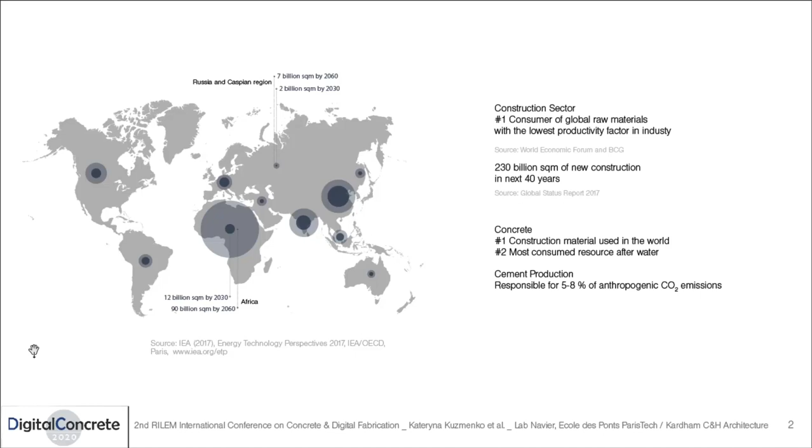This present study was made in close collaboration with Nicolas Roussel, entitled Environmental Life Cycle Assessment of 3D Concrete Printing Technology. Concrete is the most used construction material in the world, the second most used resource after water.

The environmental profile of a concrete element is mainly defined by the impact coming from cement production, which is a highly energy-intensive process that additionally emits a large amount of CO2 during limestone decarbonation, making in this way climate change the main environmental impact category of concrete.

Otherwise, the rest of the raw constituents needed for the concrete material preparation, like sand and gravel, possess a very low embedded impact. And furthermore, at the scale of the building element or building system, it has been shown that the traditional construction techniques by casting represent only around 2% of the overall environmental impact in the climate change category.

To sum up, at the scale of material, the main environmental improvement lies in the binder with cement substitution. At the scale of a building system or infrastructure, even larger optimization potential lies in the broadly discussed capacity of more precise and rational material deposition offered by digital additive manufacturing, largely known as 3D concrete printing.

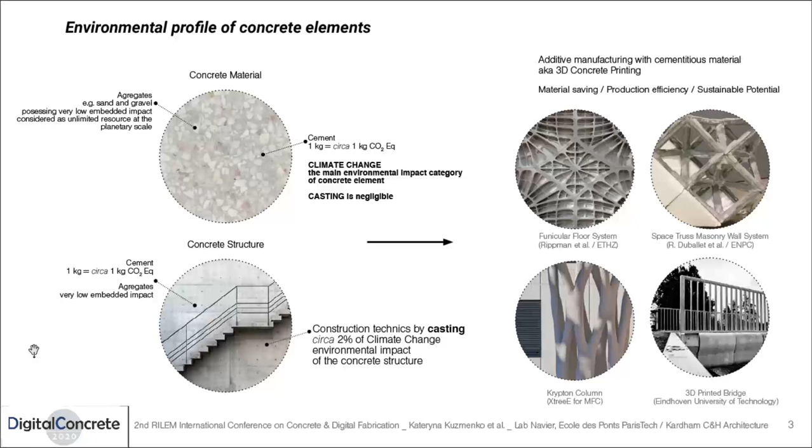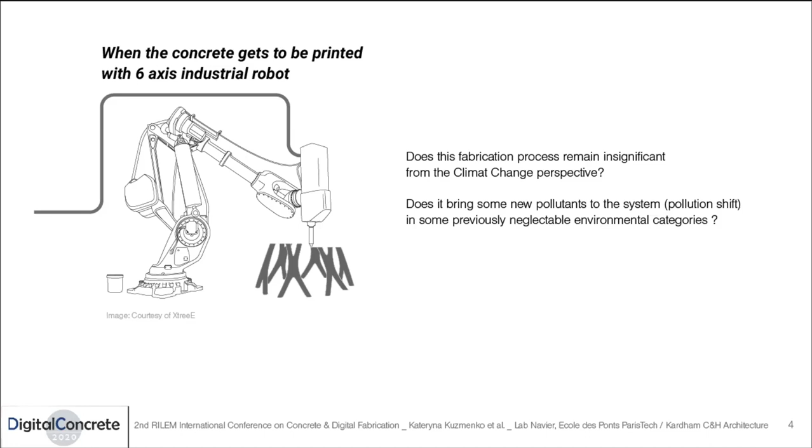Thus, when the concrete gets deposited with a 6-axis industrial robot, the main question from an environmental standpoint would be: does this fabrication process remain insignificant from the climate change perspective? And furthermore, does it bring some new pollutants to the system, so-called pollution shift, in some previously negligible environmental categories?

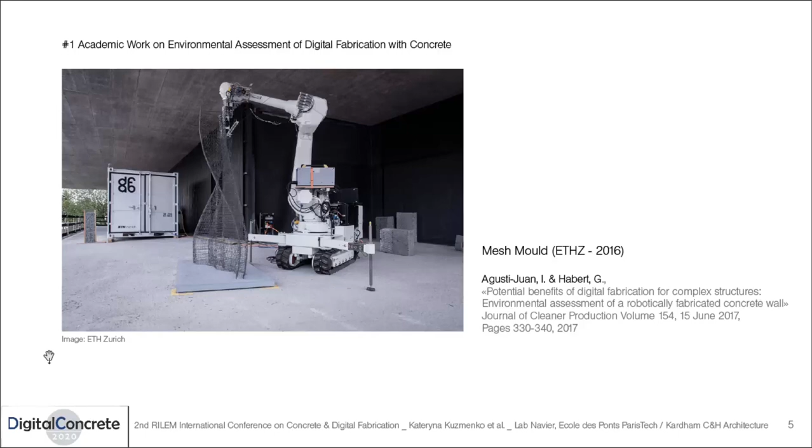Previously, there has been only one academic work studying the question. However, the mobile robotic construction technologies considered in this study remain very laboratory-like and hardly represent today an industrial setup of a printing cell, which leads us to the conclusion of a very poor state of knowledge in the field of the environmental profile and performance of 3D concrete printing technology.

The methodology of the environmental study is based on the life cycle assessment method. The method briefly consists of tracing all the energy and resources needed for the system functioning from raw material extraction to the end of life. The present study addresses mainly the fabrication phase, thus cradle-to-gate boundaries have been set as the system limit. Therefore, the printing process representing this fabrication phase is set as the process of reference, and the diagram here depicts all the processes considered within.

Basically, we can see two main flows entering the process of reference, the material footprint and the footprint of the robotic printing cell. As today the general tendency in practice goes to material reduction in the printed element, it is not exactly the footprint of material that we are going to be interested in here, but rather the compromise it will make with the impact coming from robotic construction technologies.

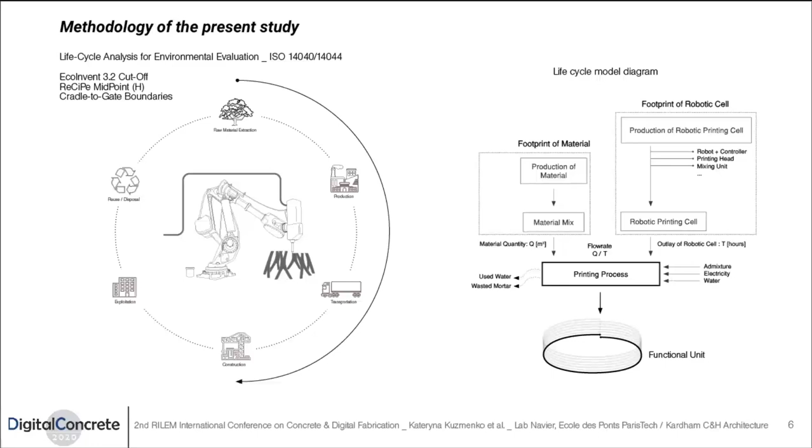In order to evaluate this compromise, the functional unit needs to be defined. Thus, in order to ensure a universal approach to the environmental study, the functional unit was set to the elementary brick of any object produced with extrusion-based additive manufacturing. It has one printed filament with a length L, section A, and an overall volume of 1 cubic meter.

Going back to the life cycle model, now with the given functional unit, we are able to quantify all the incoming flows needed for its production. Again, we've got three of them. The material footprint will be around 300 to 600 kilograms CO2 equivalent per cubic meter.

The footprint of the robotic printing cell that needs to be studied and characterized, and the impact related to the operational energy. The operational power for the present study was set to 55 kilowatts. This number comes from our industrial partner, the XtreeE company, and represents the theoretical sizing value of power consumption for the printing cell, including additional safety margins.

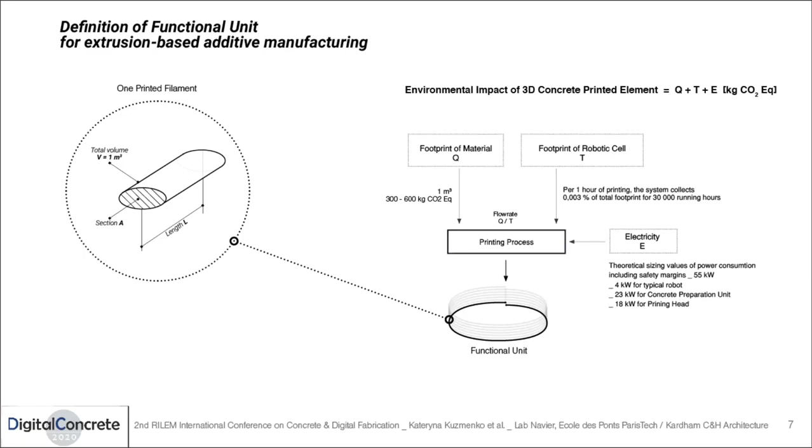The case study for the characterization of the robotic printing cell impact is based on the XtreeE layout, which is composed of an articulated ABB robot carrying the printing head developed in-house, supplied from the concrete preparation unit, and commanded by the computer workstation.

Again, the impact coming from robotic construction processes will be defined by two factors. First, the impact related to the production of all the cell's components, and second, the impact related to the operational energy, which is entirely defined by the type of electricity generation.

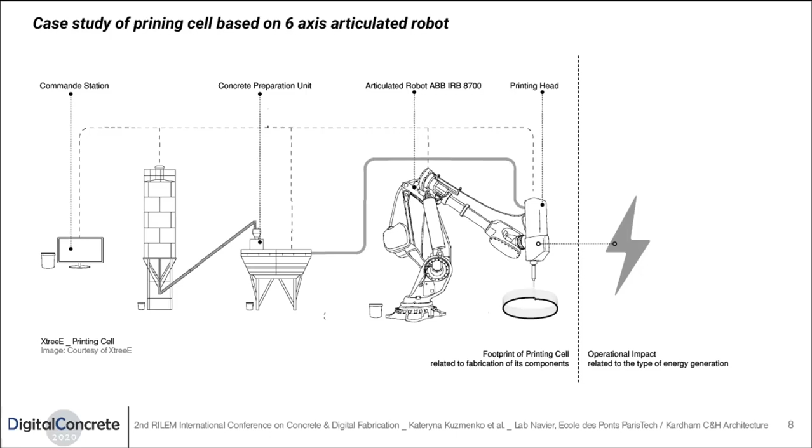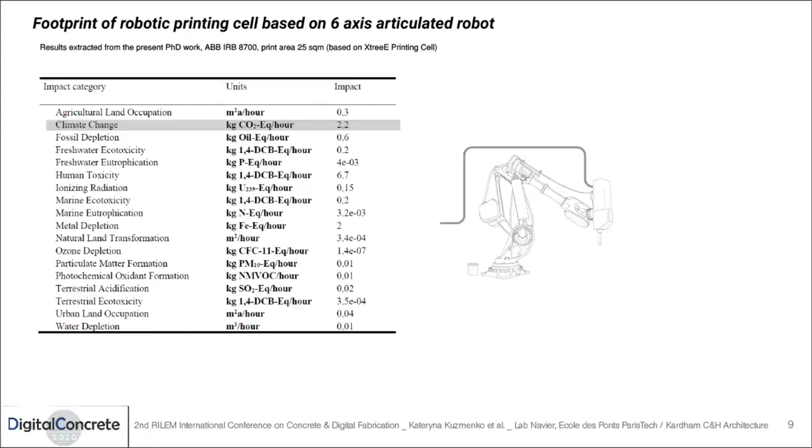In order to evaluate the footprint of the robotic printing cell, a detailed life cycle model was assembled and its outlay to the printing process is extensively studied. So here we've got the first results extracted from my present PhD work, concluding the hourly contribution related to the production of the cell to be around 2.2 kilograms CO2 equivalent per hour that the system will collect while printing. At this point, this number can be considered as negligible compared to the impact coming from material.

Furthermore, the impact of operational energy, as has been mentioned before, would be entirely defined by the type of electricity generation, which varies from one country to another. In the present study, we have been considering the world average electricity mix, which represents around 0.75 kilograms CO2 equivalent per kilowatt hour. And according to our first measurements, we chose an approximate consumption power of the printing cell of 25 kilowatts. These values still need to be validated with detailed measurements currently conducted by our team.

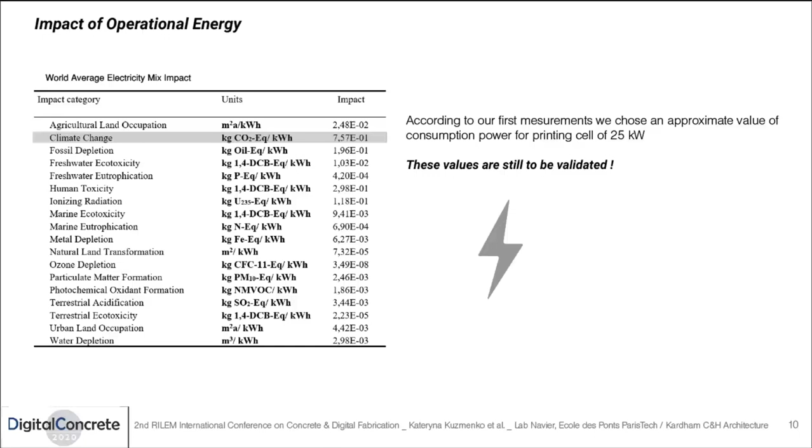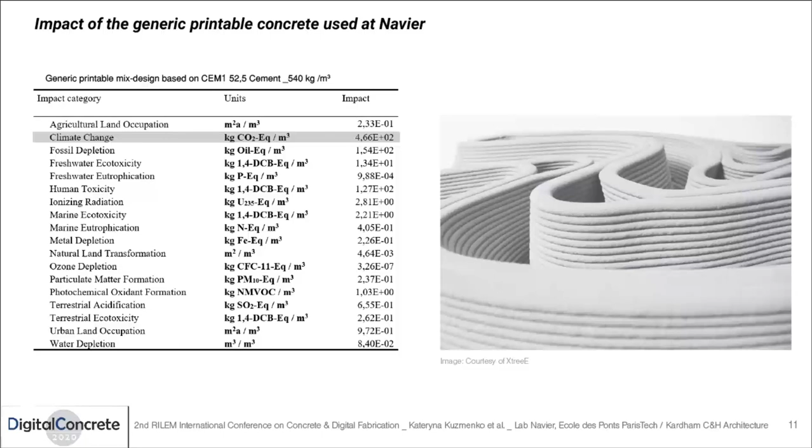Finally, the material footprint is not at all the focus of the present study, but its approximate impact is important in order to estimate the contribution coming from a robotic printing cell. Therefore, a generic mix design of printable concrete has been formulated at Navier Laboratory, and its impact in the climate change category would represent around 466 kilograms CO2 equivalent per cubic meter. To sum up, the environmental impact of any 3D concrete printed element will be defined by these three components: the material footprint, the robotic footprint, and the impact related to the operational energy of the 3D printing process.

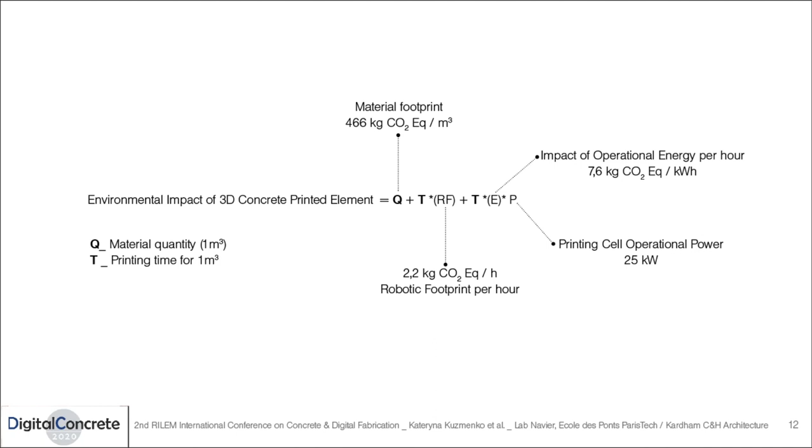So here we've got the first results of the case study of one printed filament with a total volume of 1 cubic meter deposited with a speed of 200 millimeters per second with a printing section of 1 square centimeter. Therefore, in the category of climate change, the total impact of 1 printed cubic meter will represent 750 kilograms CO2 equivalent. And the contribution coming from robotic printing processes here will be around 35% of the overall impact. Regarding the other indicators, we can observe a significant impact transfer and pollution shift caused by robotic construction processes. However, these data still need to be normalized to the global industrial context.

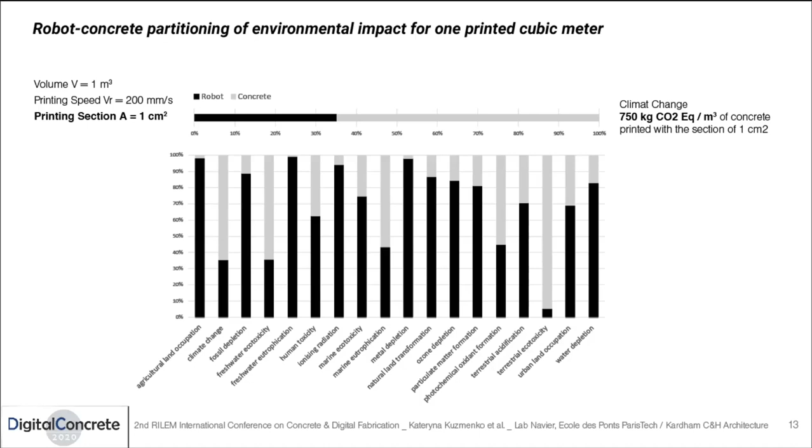In other terms, regarding, for example, the indicator of agricultural land occupation, where the robotic construction processes represent around 98%, it could simply mean that the contribution of the concrete is so low that the one of the robot turns out to be tenfold, when in absolute terms it's still very, very small and remains negligible in the global industrial framework. In closing, let's take a closer look at the overall system sensitivity, in particular the robot-concrete partitioning of the impact as a function of the printing section. For this part, printing sections from 0.2 square centimeters to 200 square centimeters were considered.

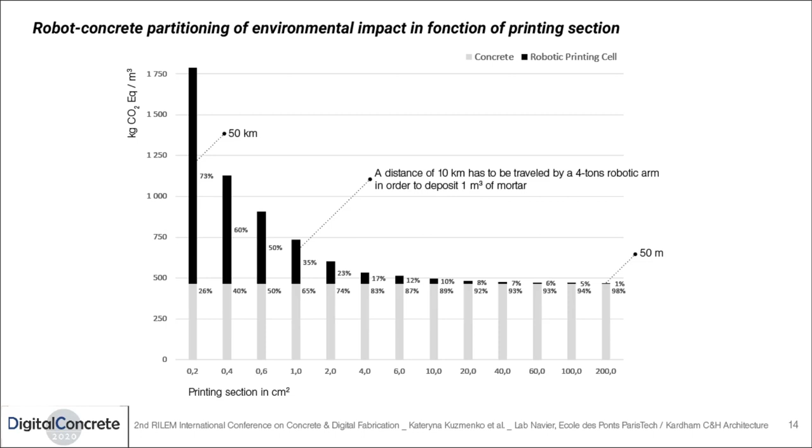And the present figure depicts a progressive decrease of the overall impact and particularly the contribution coming from the robotic printing cell as a function of the printing section, which can be explained by the simple fact that when the printing section of 1 square centimeter is considered, a distance of 10 kilometers has to be traveled by a 4-ton robotic arm in order to deposit 1 cubic meter of mortar. This distance increases to 50 kilometers when the printing section of 0.2 square centimeters is considered, and decreases to 50 meters when the printing section of 200 centimeters is considered. Which brings us to the conclusion that independently of the technological setup of the printing cell, the contribution of the printing process to the overall environmental impact of the element will be largely dominated by the mass of the printing device and the distance it travels in order to deposit a certain amount of material.

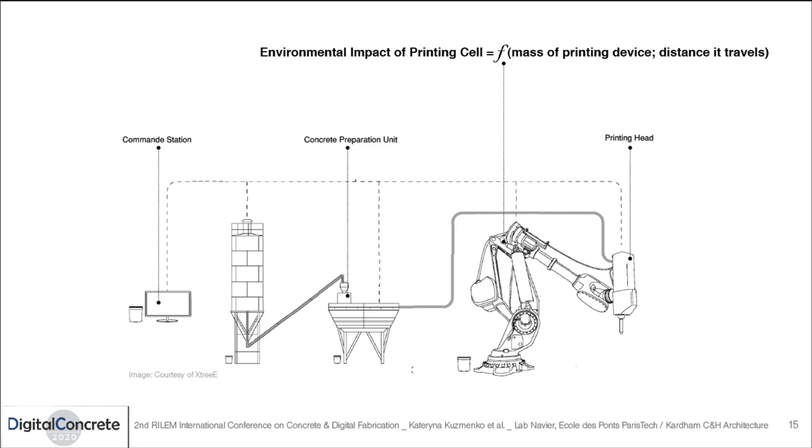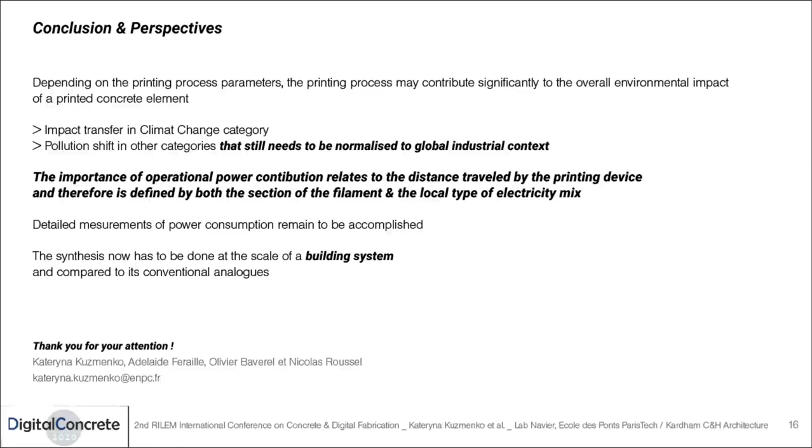At this point, the overall conclusion can be drawn that depending on the printing process parameters, the printing process may contribute significantly to the overall environmental impact of a 3D concrete printed element. The importance of the operational power contribution relates to the distance traveled by the printing device and therefore is defined by both the section of the filament and the local type of electricity mix. The detailed measurement of power consumption remains to be accomplished in order to validate the present hypothesis. Furthermore, a synthesis has to be done at the scale of a building system and compared to its conventional analogues in order to ponder the supreme question of the overall environmental performance of 3D concrete printing technology and 3D concrete printed elements over their conventional analogues.